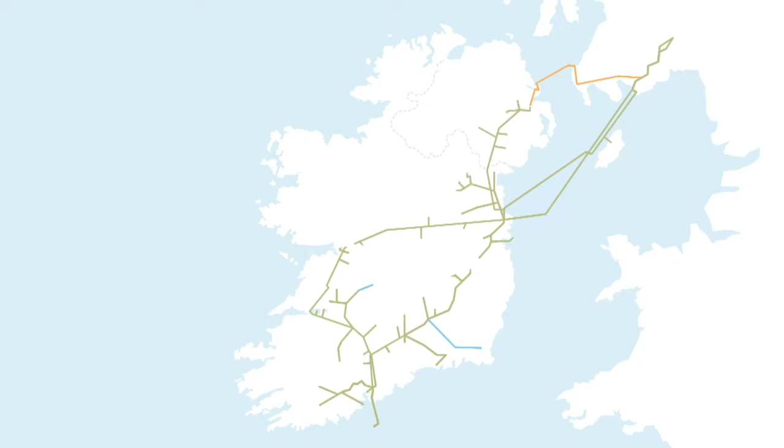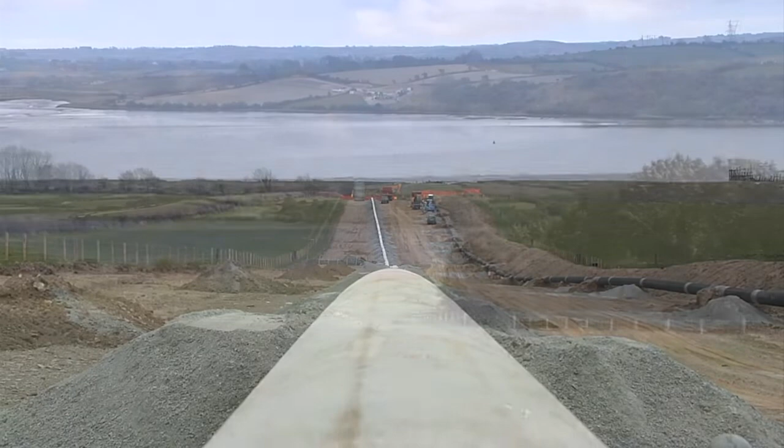Gas Networks Ireland has developed a world-class natural gas infrastructure in Ireland. Over 13,000 kilometres of buried gas pipelines transport natural gas throughout the country, passing invisibly through some of Ireland's most beautiful countryside and most populated cities.

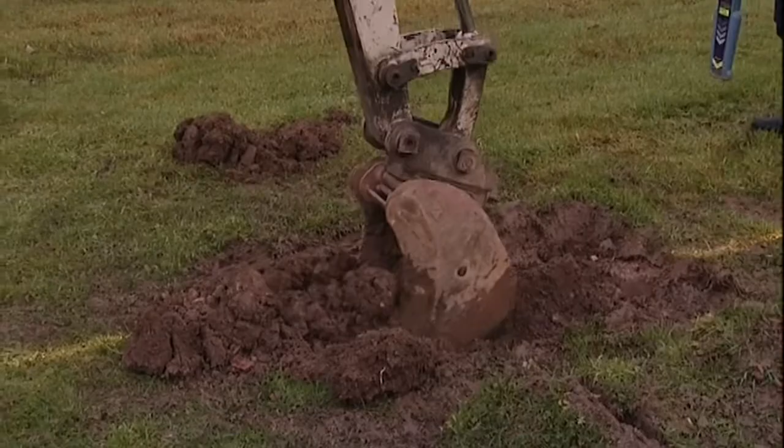These pipelines cross rivers, canals and railways. They run through villages, towns and cities, often running alongside other underground pipes and cables to serve houses, schools and factories. Any damage to these pipelines caused by excavation or other groundworks puts people, property and the environment at risk. Pipeline safety is at the heart of our business.

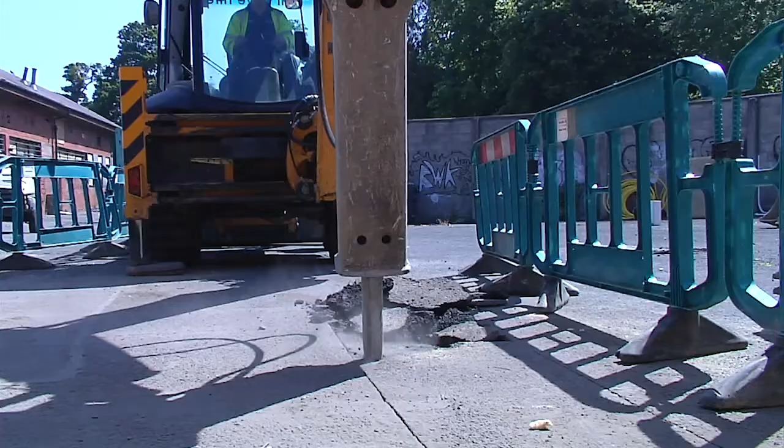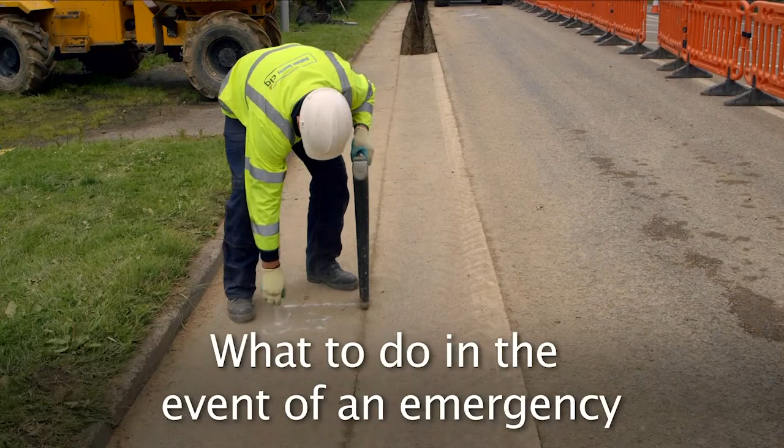This video contains information about the risks associated with working near natural gas pipelines, including where and how to find pipelines, how to reduce the risk of damaging them, and what to do in the event of an emergency. Natural gas is beneficial to both society and industry, as it's a clean, efficient fuel that can be piped directly into the premises of the people who use it.

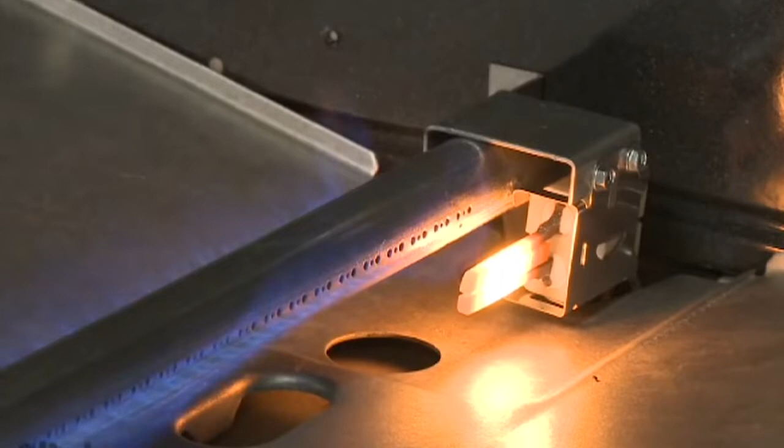The GNI pipelines are monitored 24/7 every day of the year by our grid control department. However, once they become buried, they are effectively invisible, so great care needs to be taken when working near them. Like all fuels, natural gas is flammable. A distinctive smell is added to it for safety. When used correctly, natural gas is a clean, efficient fuel that brings heat and energy to homes, businesses and industry across Ireland.

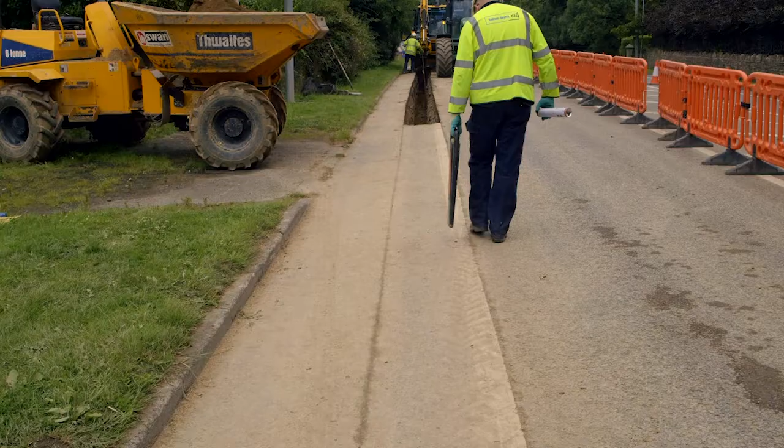Under the legislation, employers are required to provide a safe place of work for their employees, implement safe systems of work for their employees and those that might be affected by the work activities, including high-risk work such as work near underground services. Many instances of damage to underground services are reported to the Health and Safety Authority every year, and in most cases our investigations show that these are preventable. They're normally due to a lack of planning, a lack of identification of the services and a lack of consultation with the service provider.

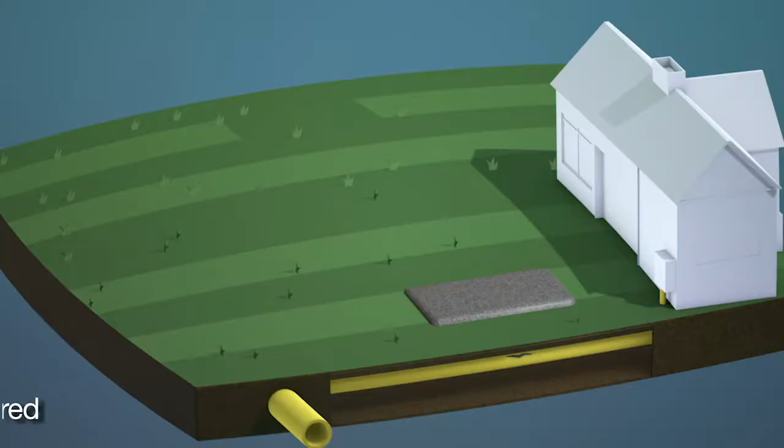When a pipeline is damaged, however, it can result in an uncontrolled gas release. Leaking gas can be ignited by a spark, resulting in a fire or an explosion. High concentrations of natural gas in an enclosed space will displace oxygen and can cause loss of mobility, unconsciousness, or asphyxiation. The pressure in high-pressure gas pipelines alone can cause serious injury or death if released suddenly.

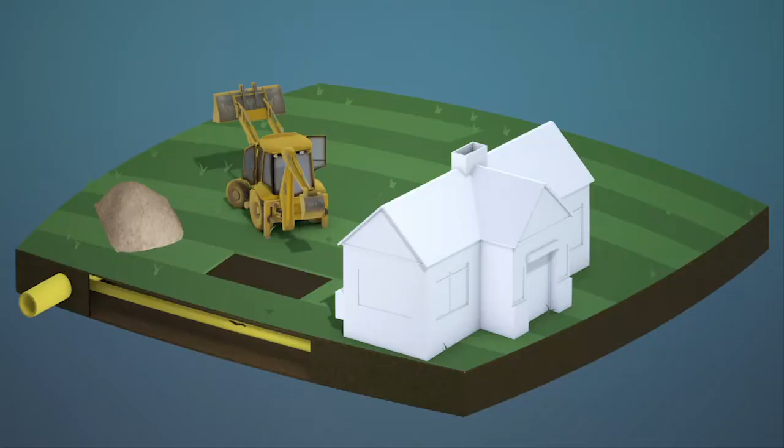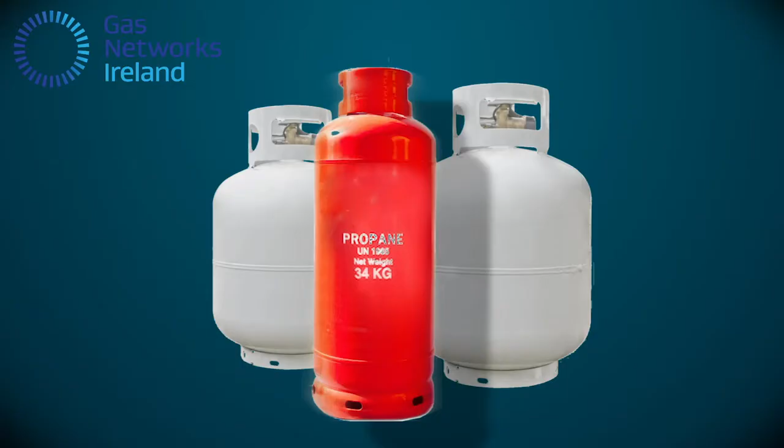Natural gas is lighter than air, so if it escapes from a pipeline, it will normally rise and disperse into the atmosphere. However, if obstructed, it may travel through ducts, sewers, chambers, or voids, and potentially build up inside a premises or confined space. Natural gas shouldn't be confused with liquefied petroleum gas, LPG, which is heavier than air and sinks to the ground when released.

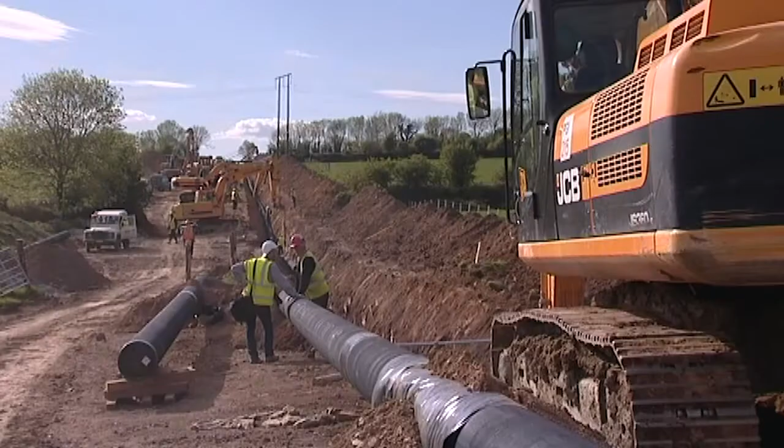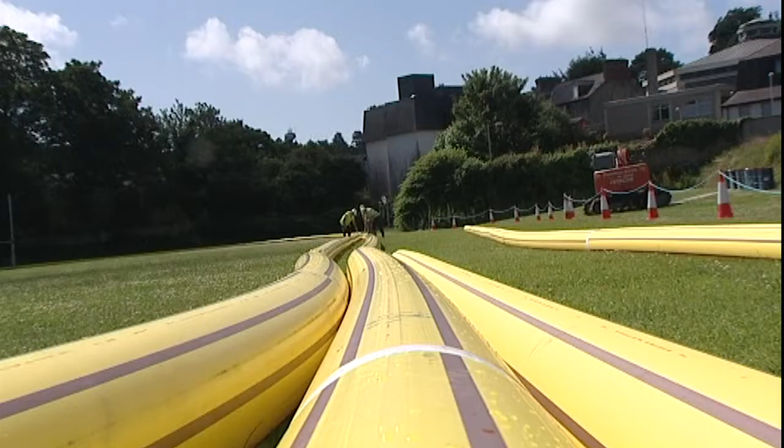The transmission system is made up of steel pipes carrying natural gas across country to towns and cities. It operates at high pressures up to 85 bar, which is over 30 times the average car tyre pressure. The distribution system is constructed of yellow plastic polyethylene pipes and some cast ductile iron pipe. It transports natural gas in urban and suburban areas, supplying homes and businesses. It operates at lower pressures of up to 4 bar.

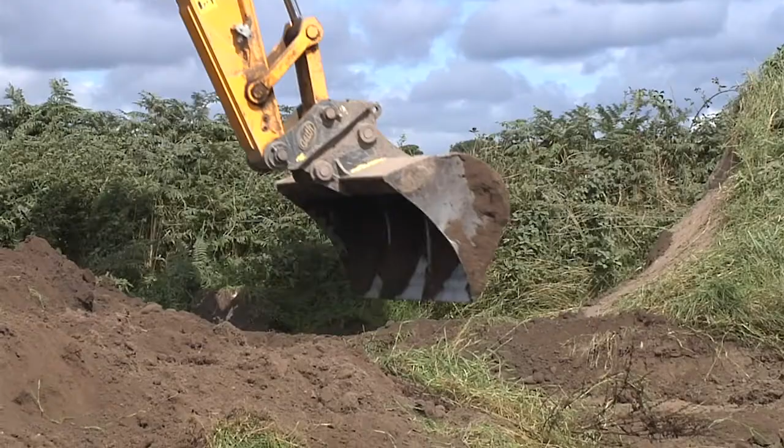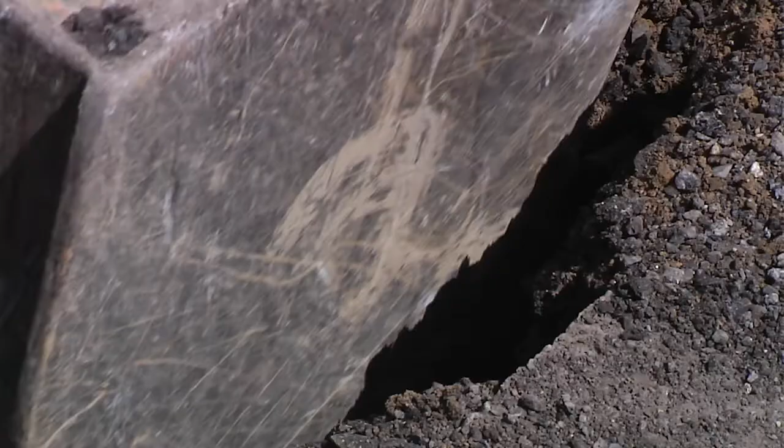Accidental damage is the biggest threat to GNI's pipelines. It's very important if you damage them in any way that you contact us immediately. Approximately 40 incidents of unauthorised excavations occur in the vicinity of our transmission pipelines every year, as well as several hundred cases of actual damage to our distribution pipework. Each one of these instances has the potential to cause great harm for the people involved.

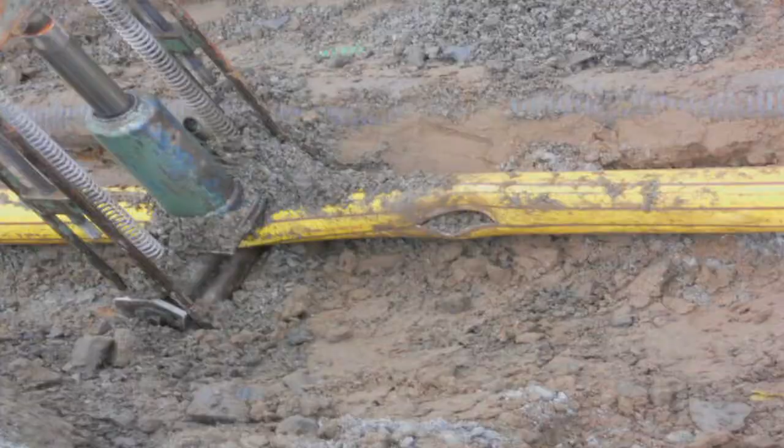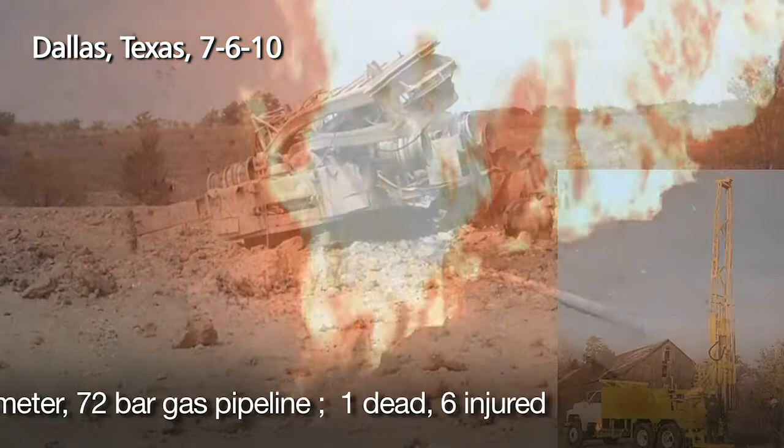Every year there are hundreds of incidents of damage to gas pipelines in Ireland caused by contractors, landowners and others carrying out excavation and other groundworks. Fortunately, serious incidents are rare. However, the potential consequences of a gas escape from even a low-pressure pipeline can be severe. Anyone working close to gas pipelines has an obligation to protect themselves and others from the risks associated with their work, including the risk of damaging a pipeline.

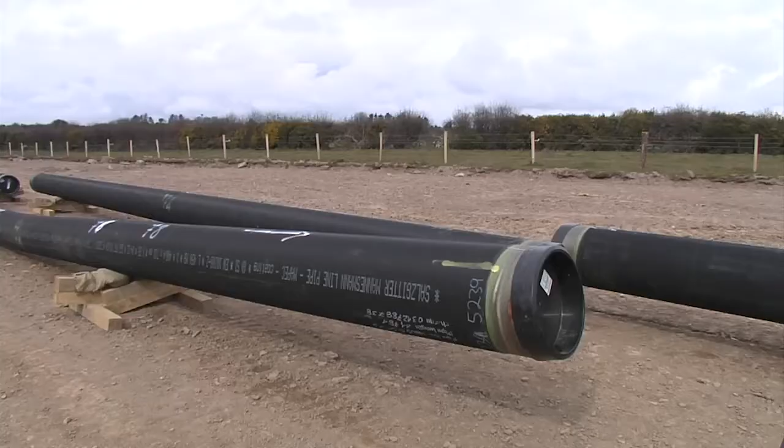High-pressure gas transmission pipelines are normally buried to a depth of 1.2 meters and have a black polyethylene or concrete coating. Once reinstated, nearly all evidence of a buried pipeline is removed and routine farming activities like ploughing and cultivation will not affect it.

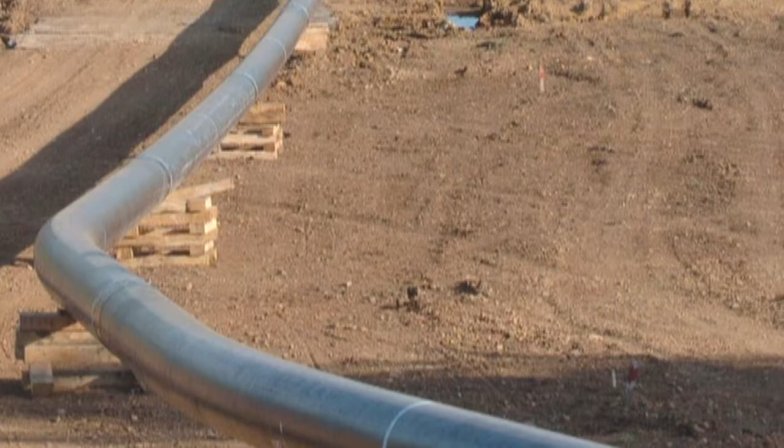Pipeline marker posts help our staff and the public identify the route of the pipeline by indicating the position of the pipeline at land and road boundaries. If you come across a marker post, then a transmission pipeline is nearby. But be aware that the pipeline may not run in a straight line between marker posts. Markers can also be accidentally moved and shouldn't be relied on for complete accuracy.

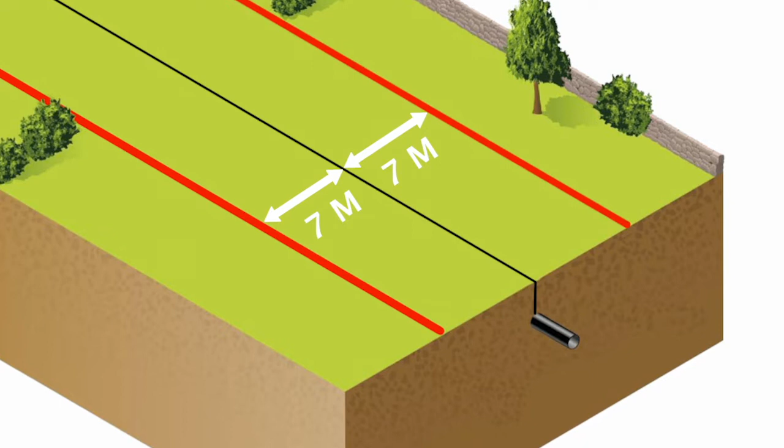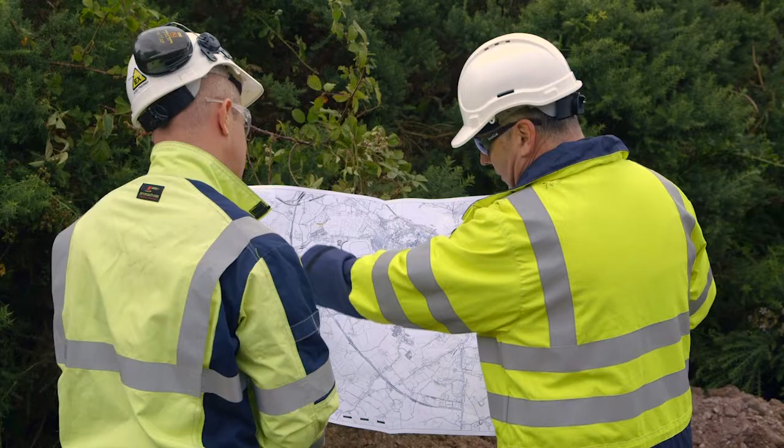Gas Networks Ireland has certain rights within the strip of land or wayleave that normally extends 7 metres either side of the transmission pipeline. Our permission is needed to carry out excavation works within this area. Contact our Dial Before You Dig service and we will give you advice on what is required to complete the work safely. We will provide maps showing the location of the pipeline and will supervise the works free of charge in almost all cases.

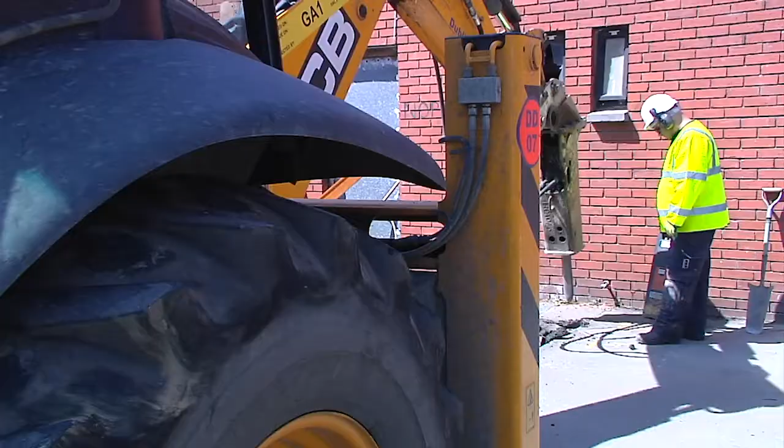We monitor our pipelines by regular helicopter surveys and vehicle and foot patrols. For your safety and that of others, we will act to stop unauthorised works where they threaten the safety of our pipelines.

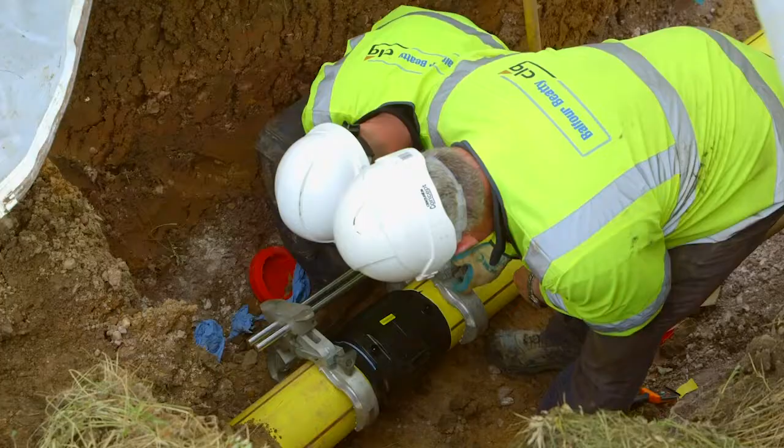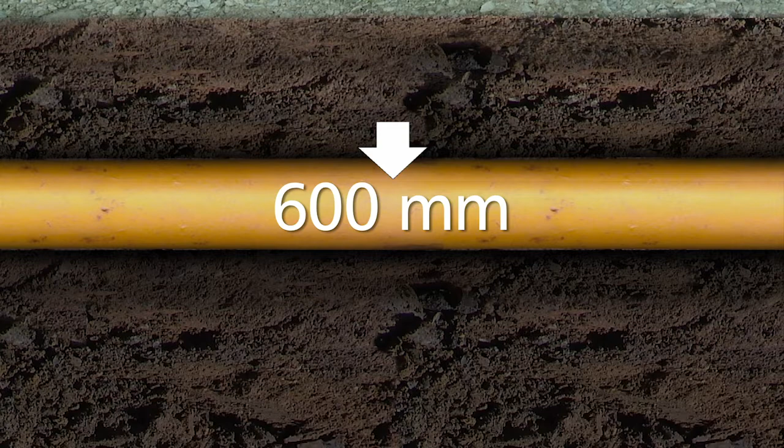Distribution pipelines are mainly found in cities and suburbs where they operate at medium and low pressures, supplying homes, businesses, hospitals and schools. Mains gas pipes run in the footpath, grass verge or road and are normally buried to a depth of at least 600 millimetres. There may be visible clues to their location, such as reinstatement patches or valve covers.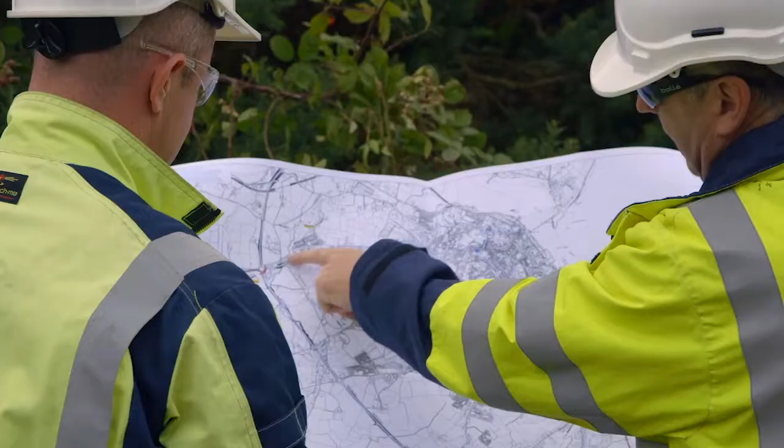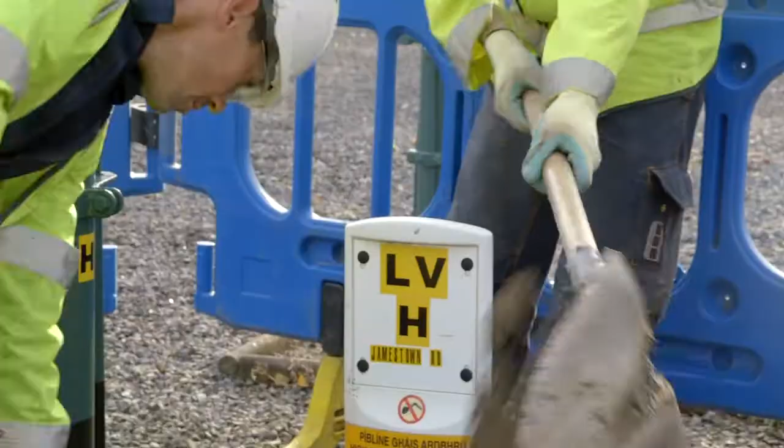Over time, however, roads may be resurfaced or realigned, and ground levels may be changed, so the location may no longer be apparent and the depth of cover may have been altered. It is therefore necessary to confirm the location of all gas mains and services by hand-digging trial holes over them before any other excavation works commence in their vicinity.

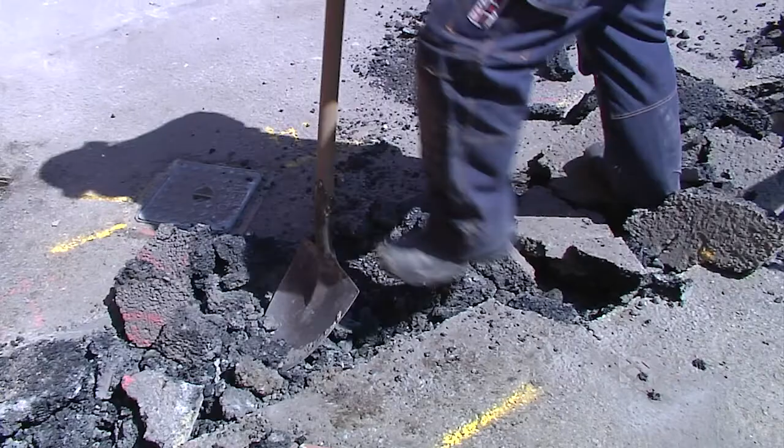Service pipes are gas pipes that feed individual properties. They are connected from the top of the mains and usually run at right angles from the road to the meter point at the building. They are not shown on network maps or drawings, but will usually be buried at a depth of 450 millimetres, rising to 375 millimetres as they approach the building. Extra care should be taken when locating them by using safe digging practices.

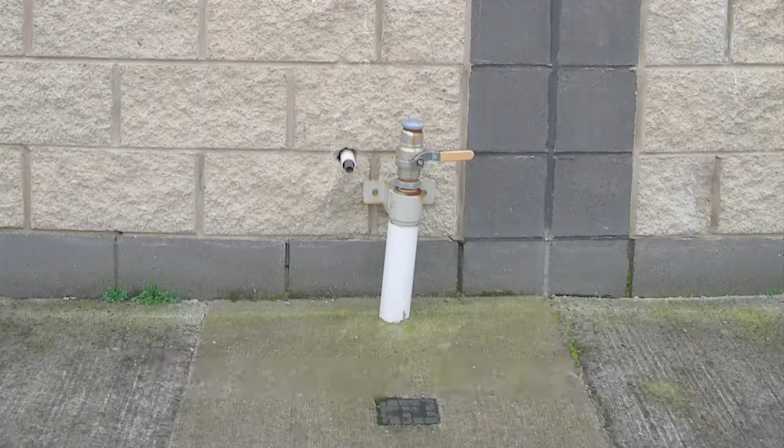Because they are plastic, distribution mains and service pipes are not normally traceable using a cable avoidance tool and signal generator, or cat and genny. To help identify the presence of services, look for gas meter boxes or cabinets, house entry points, service risers, gas valve covers. In older buildings, gas meters might be located inside with no visible signs of a service. In this case, check inside the building to locate the meter.

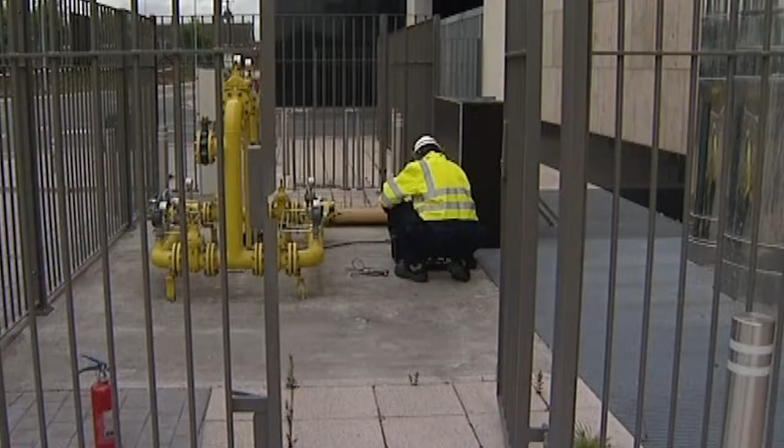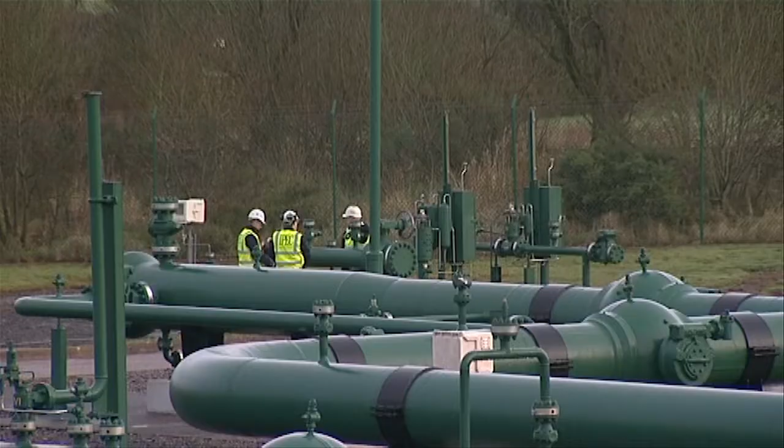Gas Networks Ireland also owns pressure regulating stations located throughout the country that help to control and operate the gas pipeline network. These stations are landscaped to blend in with the surrounding area but can be identified by Gas Networks Ireland signage. Above ground installations, AGIs, are normally surrounded by a fence and contain visible arrangements of pipework and ancillary equipment. Underground installations, UGIs, will not have visible pipework as they are contained within a chamber under a metal or concrete cover plate. These facilities should alert you to the presence of buried gas pipelines in the vicinity.

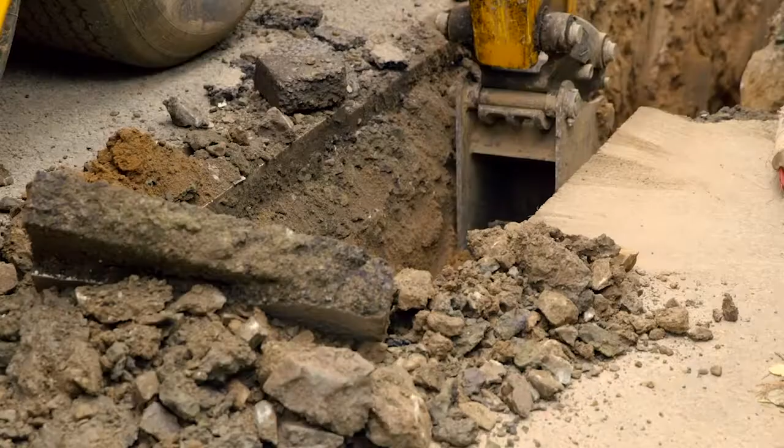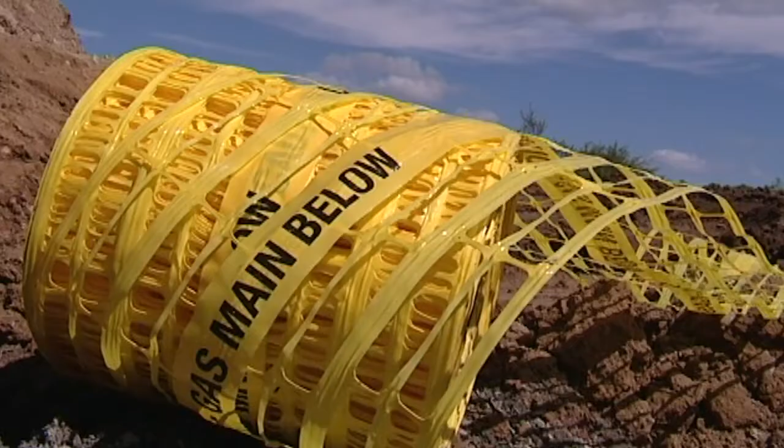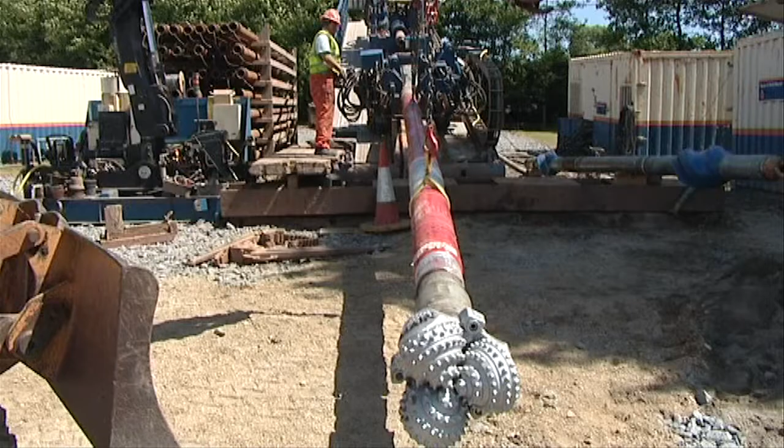Gas pipelines are constructed using 3 main methods. Open cut construction installs pipe using standard trenching techniques. Pipe is normally laid with sand or pea gravel surrounding it, and gas marker tape is placed above the sand or gravel layer. Insertion uses old metal gas mains as a carrier for inserting new plastic pipes. Moling or directional drilling uses a machine to drill underground from one location to another, pulling the pipe behind it.

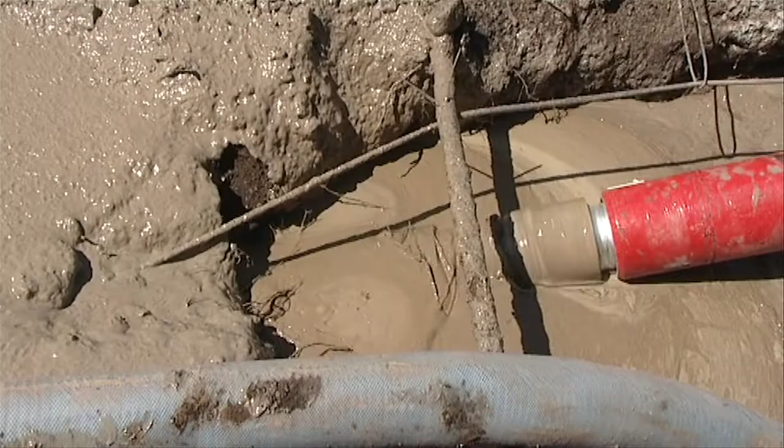Where insertion or moling techniques have been used, the gas pipe will not have sand or gravel surrounding it and will not have a marker tape above it. Concrete slabbing is also used in some areas where the pipe is buried at shallow depths.

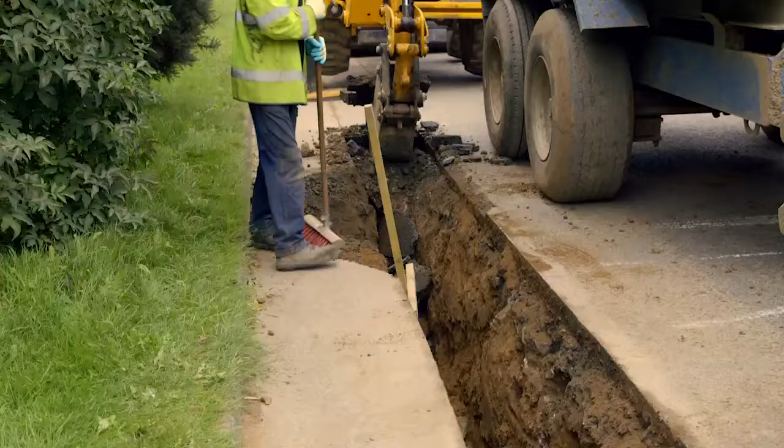Working near our pipelines poses a risk to the safety of both workers and the public. Health and safety legislation requires a safe system of work to be used to help reduce this risk. The elements that make up the safe system of work initially start with the design, planning and consultation with your service provider. Following that, using the up-to-date utility maps to identify the services on site using a competent person with the appropriate locating devices. After that, the next stage in the safe system of work is implementing safe digging practices appropriate to the services.

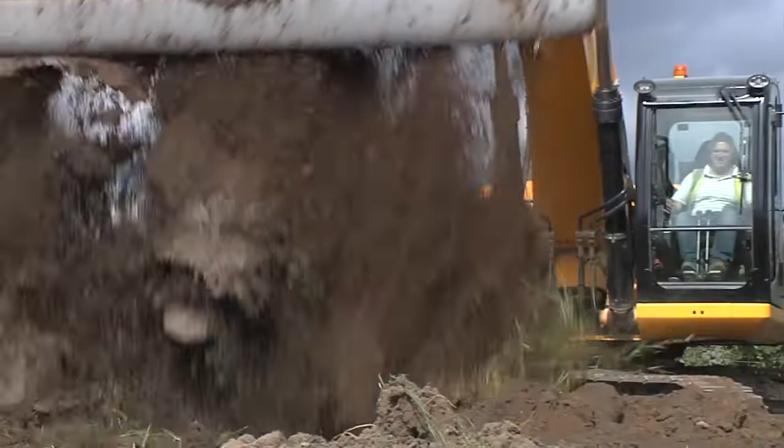Certain activities are higher risk than others and require additional controls. Explosives may not be used within 30 metres of any gas pipe without prior notification to Gas Networks Ireland. This increases to 400 metres for transmission pipelines.

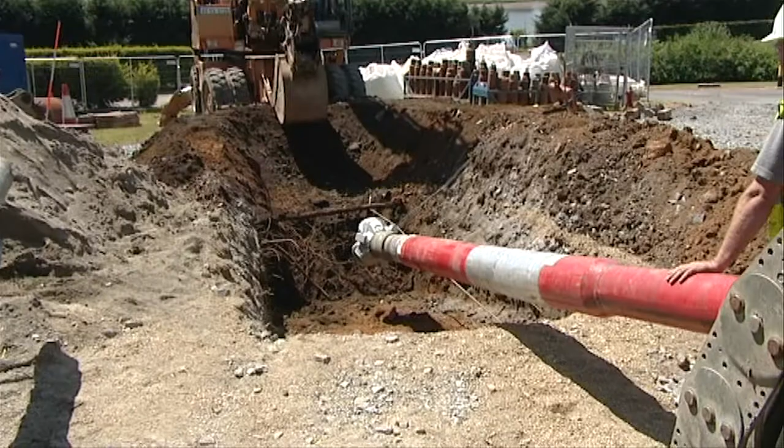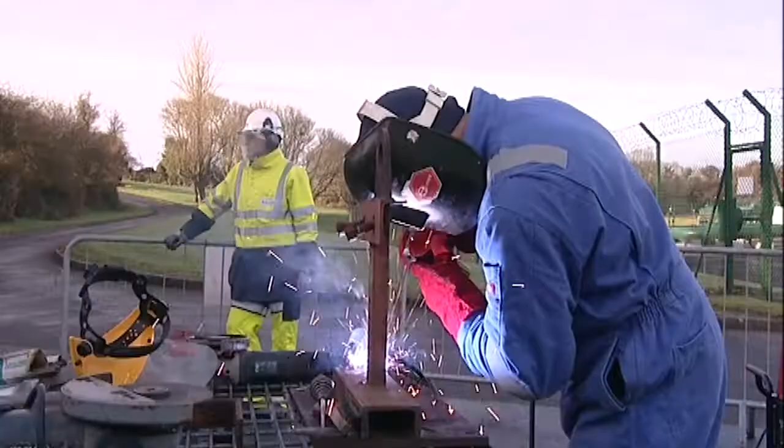Consult Gas Networks Ireland when piling, directional drilling and boring within 15 metres of a gas pipeline, or when performing hot works where there is potential for a gaseous atmosphere to exist. If you are carrying out any of these activities, be sure to inform us when discussing the works.

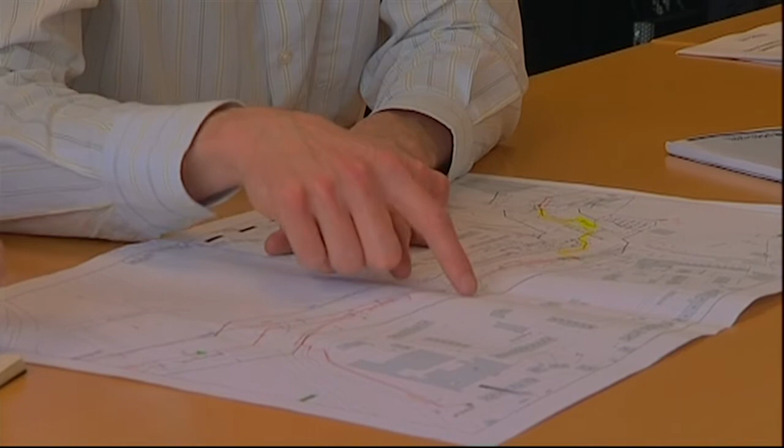To find out whether there are gas pipelines where you plan to excavate, contact the Gas Networks Ireland Dial Before You Dig service and we will work with you to ensure the activities can be completed safely. Network maps are provided by post or email, typically within 5 working days of your initial contact.

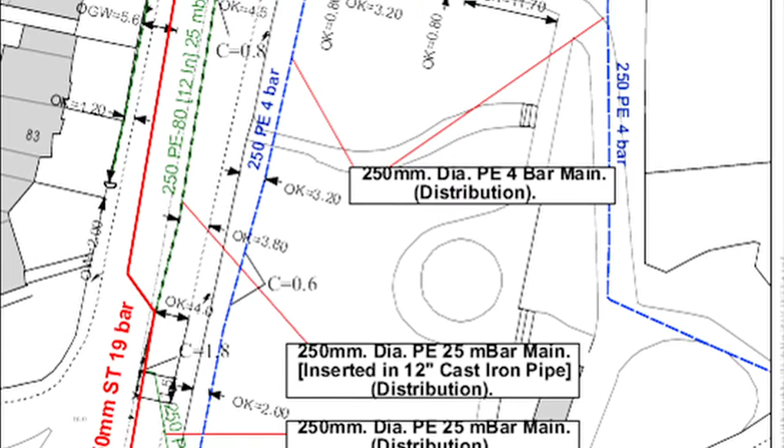When reading maps, red lines show transmission mains, blue show distribution medium pressure mains, and green show distribution low pressure mains. If red lines are present on the network map you have received, you must consult further with Gas Networks Ireland before starting works. Pressure regulating stations are also marked on network maps.

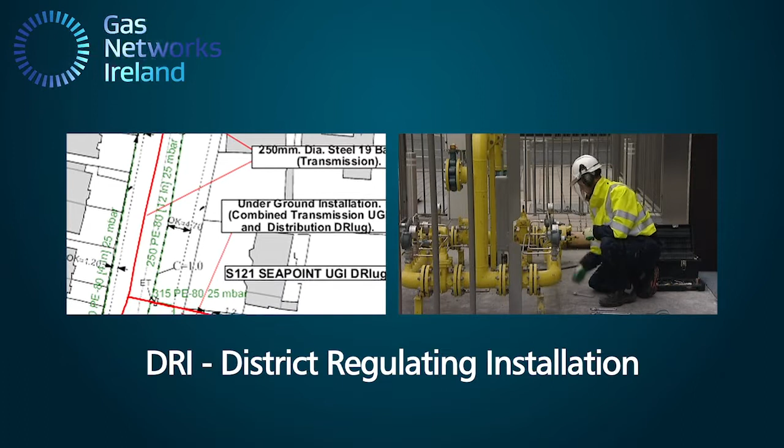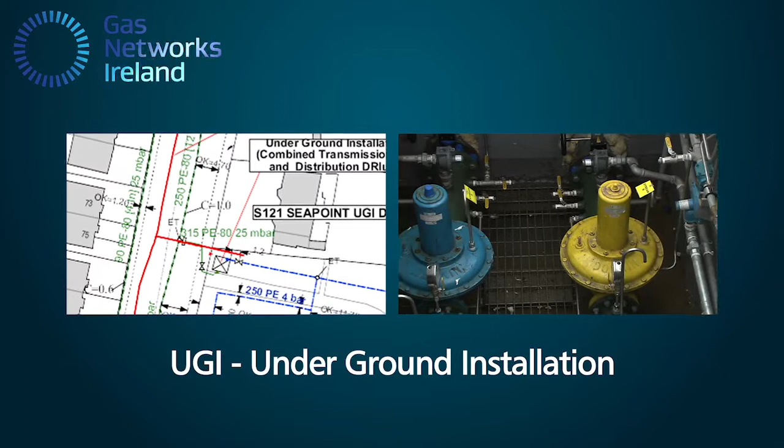DRI, District Regulating Installation. DRI UG, District Regulating Installation, underground. UGI, underground installation. AGI, above ground installation.

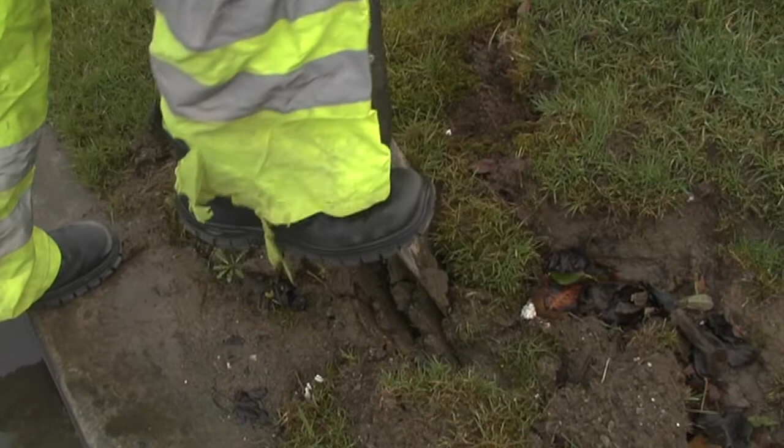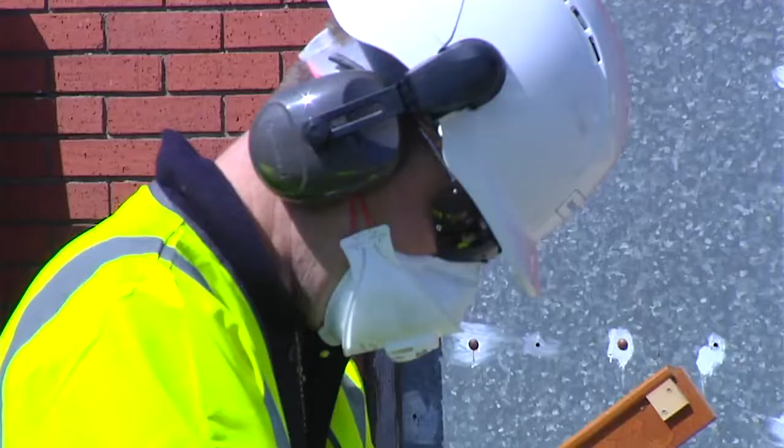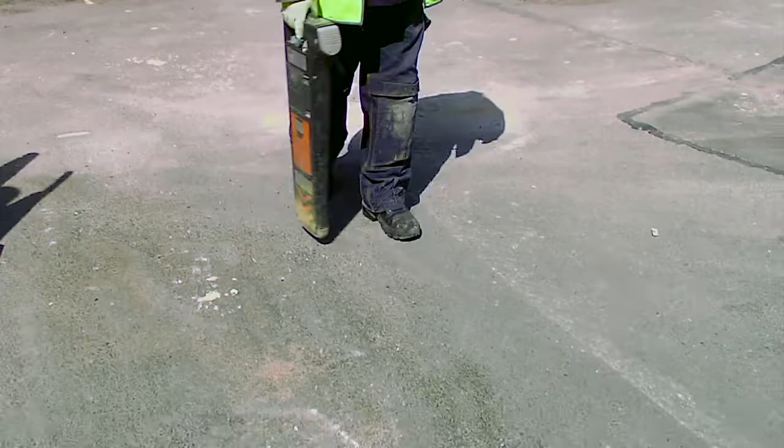Hand digging methods present the lowest risk of causing damage when excavating near a known or suspected gas pipeline. Handheld power tools pose a significant risk to the pipeline, which in turn pose a significant risk to the operatives involved in the work. They must not be used within 1.5 metres of a transmission pipeline and should never be used directly over distribution pipelines without positively locating the pipeline beforehand and taking precautions to prevent damage to the pipeline.

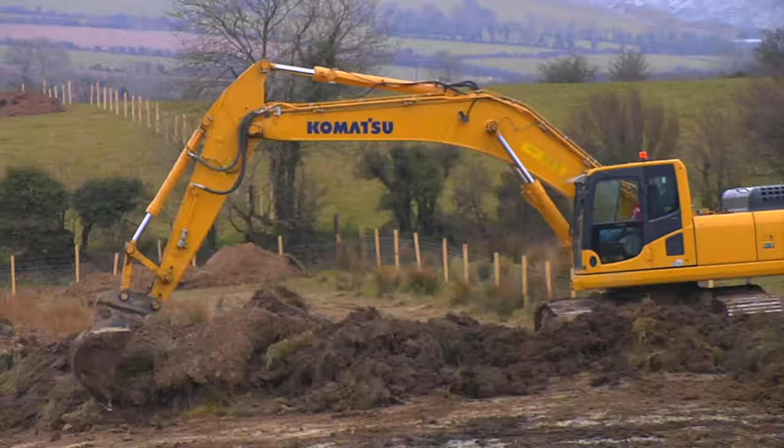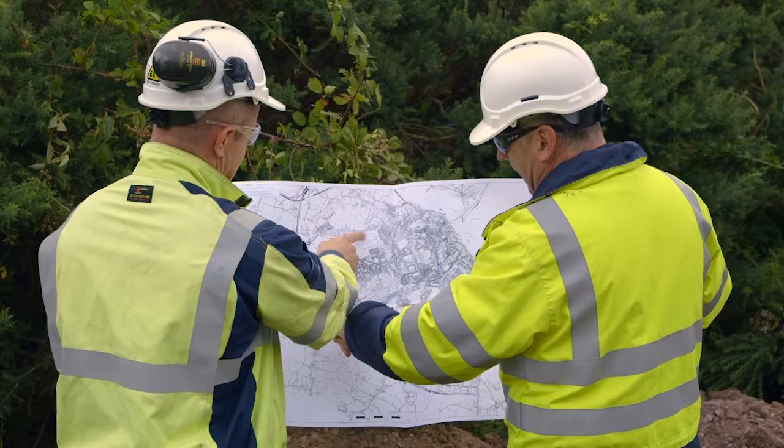Mechanical excavators, boring augers, and other powered plant present the highest risk to pipelines and must not be used within 3 metres of a transmission pipeline or within 500 millimetres of a distribution pipeline without prior consultation with Gas Networks Ireland. If in doubt as to the location of a transmission or distribution pipeline, contact the Dial Before You Dig service.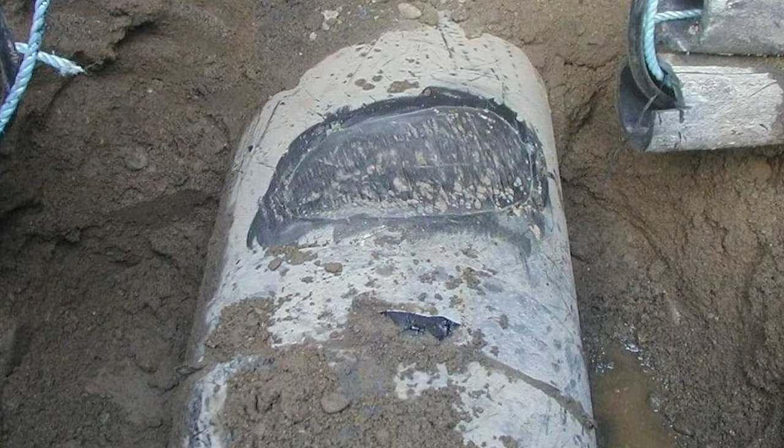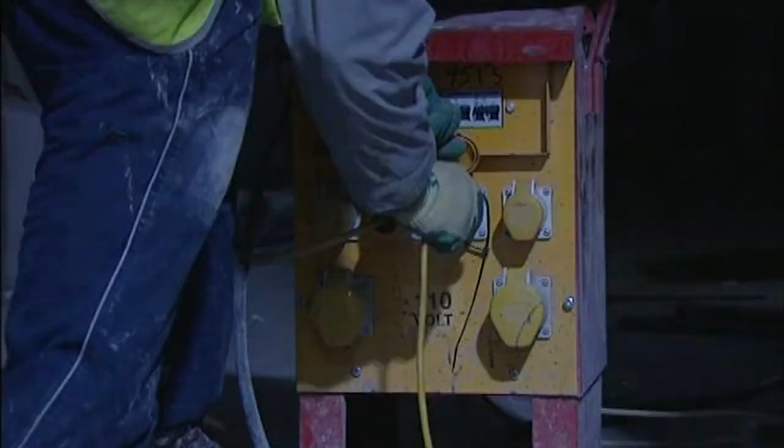If a pipeline is damaged even slightly, the following precautions must be taken. Move people away from and upwind of the affected area. Restrict employee and public access to the affected area. Don't turn any electrical switches on or off. Do not operate any plant or equipment. Prevent smoking, the use of naked flames, mobile phones and other ignition sources in the vicinity of the leak.

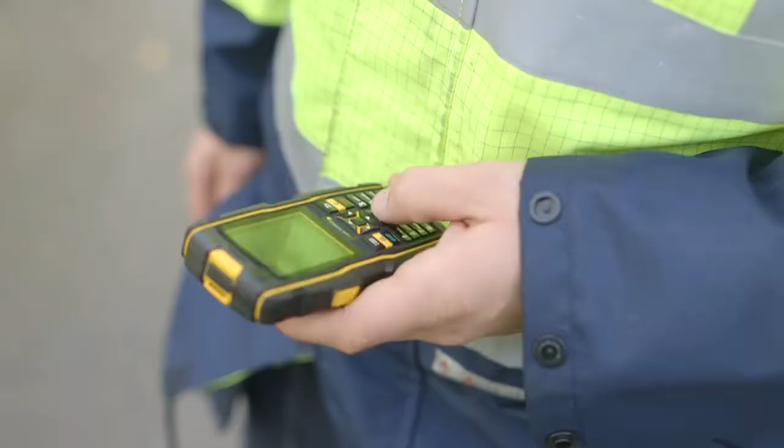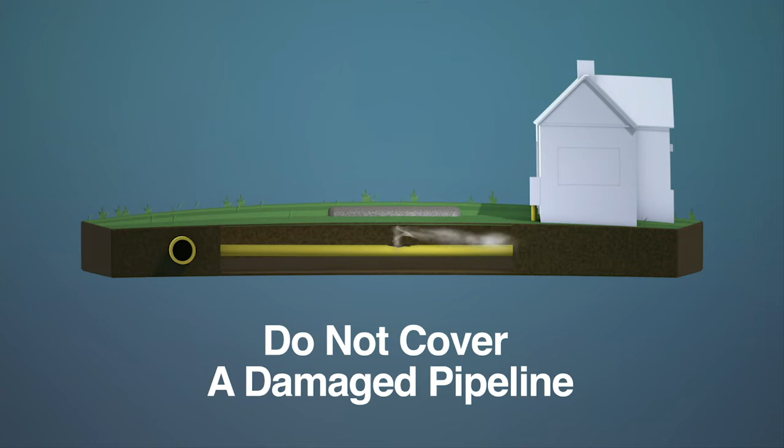Move away to a safe distance and ring Gas Networks Ireland immediately on our 24-hour emergency service on 1800 20 50 50, providing accurate information on your location and the nature of the incident. Do not attempt to repair the damage. Don't cover up a damaged pipeline. This may lead to gas travelling through ducts, sewers, chambers or voids and potentially building up inside a premises or confined space.

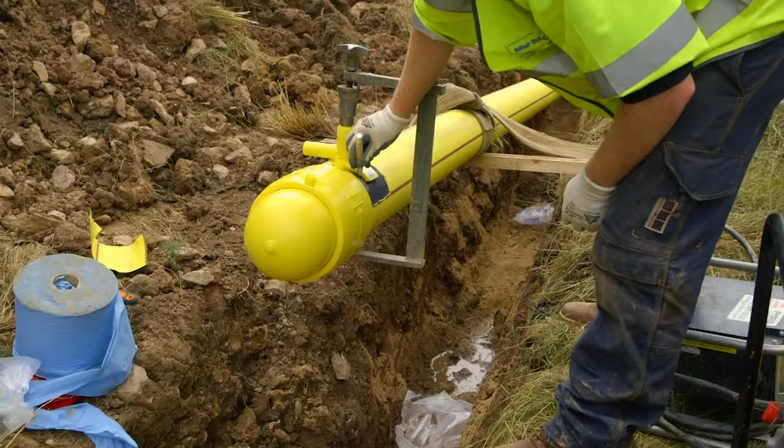Don't turn off any gas valves in the road or footpath. You may be causing further problems by doing so. Don't try to stop any product from leaking or to extinguish any fire. Assist Gas Networks Ireland emergency personnel. There may be no evidence of a leak, but damage even to the coated surface of the pipe could lead to problems in the future. Report any damage, no matter how slight, as soon as it happens.

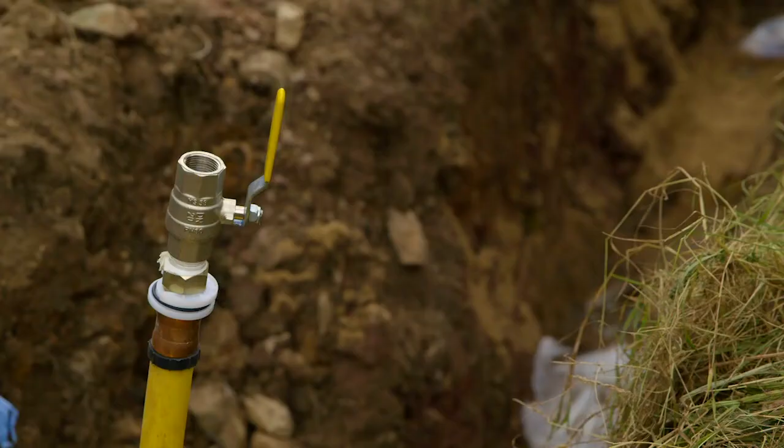Gas Networks Ireland encourages anyone carrying out excavation or other groundworks to follow a few simple steps that could ultimately save lives. When planning excavation works, call 1800 42 77 47 or email us on dig@gasnetworks.ie to obtain up-to-date gas network maps. Follow the Gas Networks Ireland safety advice for working in the vicinity of natural gas pipes and the HSA Code of Practice for avoiding danger from underground services by using safe systems of work at all times.

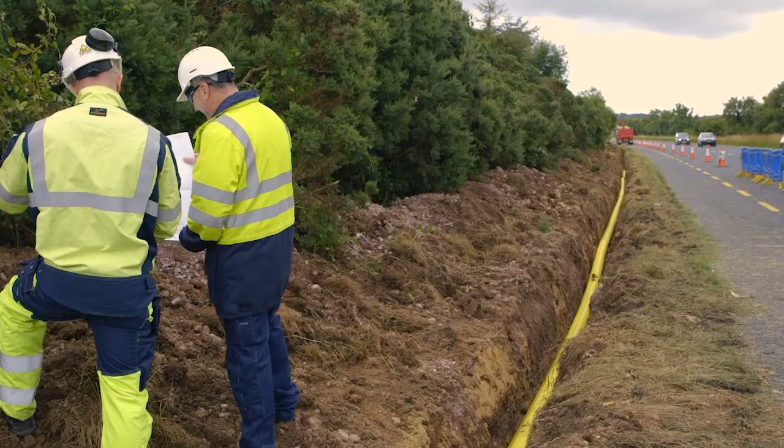If you have damaged a gas pipe, call 1800 20 50 50 immediately, even if you don't suspect that gas is leaking. By working together, we can reduce the risks of injury to people, we can reduce the risk of damage to property and the environment, and we can ensure that excavations and other groundworks are completed safely and efficiently.